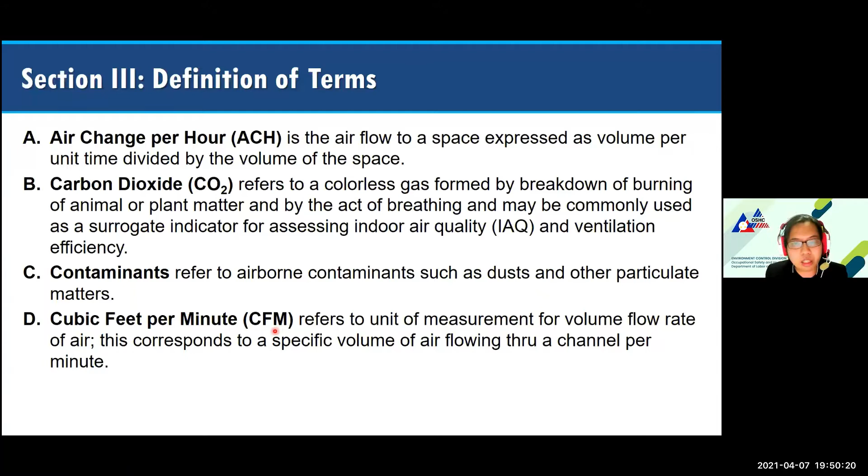Enclosed spaces are areas that have means of entry or exit, surrounded by walls and ceilings, and designated or designed for continuous occupancy. It may or may not have windows that could be freely opened, and this may include but is not limited to meeting rooms, conference halls, ballrooms, churches, etc. So anything that is a workplace surrounded by walls can be classified as an enclosed space.

General ventilation refers to the flow of air into and out of a working area to dilute any contaminants by providing additional fresh or natural air. General ventilation can be provided through natural or mechanical means. As we have learned in basic occupational safety and health, dilution ventilation through natural or mechanical means, or both, should be considered as the primary engineering control. Ventilation conditions can be evaluated through the measurement of air change per hour and carbon dioxide.

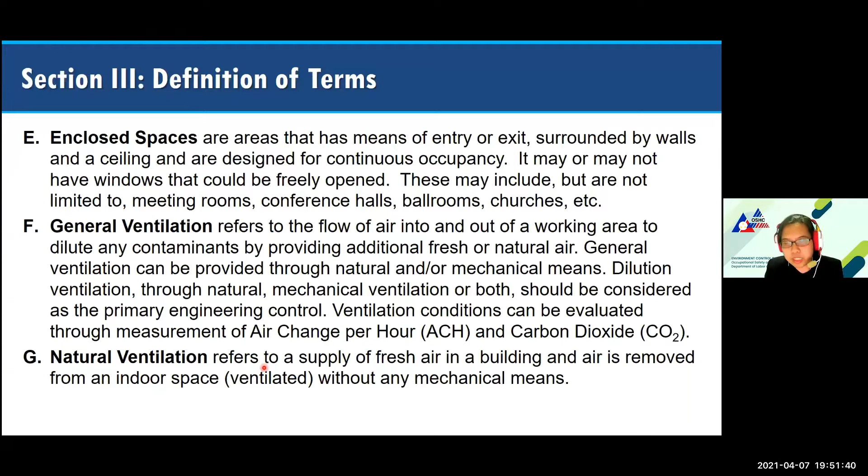Natural ventilation refers to a supply of fresh air in a building where air is removed from an indoor space without any mechanical means. And if there's natural, we also have mechanical, which refers to the use of mechanical systems such as fans, and often involves heating, ventilation, and air conditioning (HVAC) units or systems to supply or provide fresh air and even extract contaminated air. HVAC is the technology of indoor and vehicular environment comfort, and its goal is to provide thermal comfort and acceptable indoor air quality.

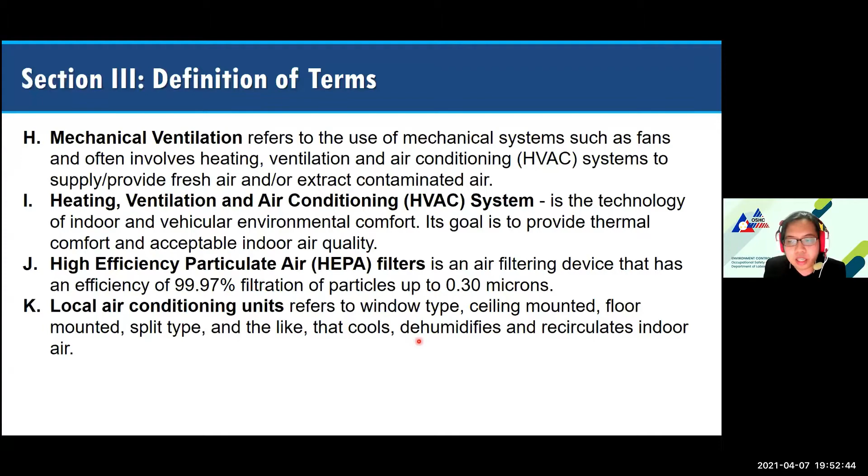High efficiency particulate air filters, commonly called HEPA filters, is an air filter device that has an efficiency of 99.97% filtration of particles up to 0.3 microns that it can filter out. And local air conditioning unit refers to window type, ceiling mounted, floor mounted, split type, and other cooling systems that dehumidify and recirculate indoor air inside a workroom.

Local exhaust ventilation refers to a mechanical system that is used to control contaminants by trapping them at or near the source. The objective of local exhaust ventilation is to prevent highly toxic contaminants before they reach the worker's breathing zone. It is designed to capture an emitted contaminant at or near its source before the contaminant has a chance to disperse into the workplace.

Okay. Minimum efficiency reporting value, or most commonly called the MERV, is a classification of air filtration devices based on their efficiency to filter particulates. Now, meron din po tayong objectionable air draft, which refers to very high or too much air movement directed towards the worker. So this is a disturbing type of air velocity.

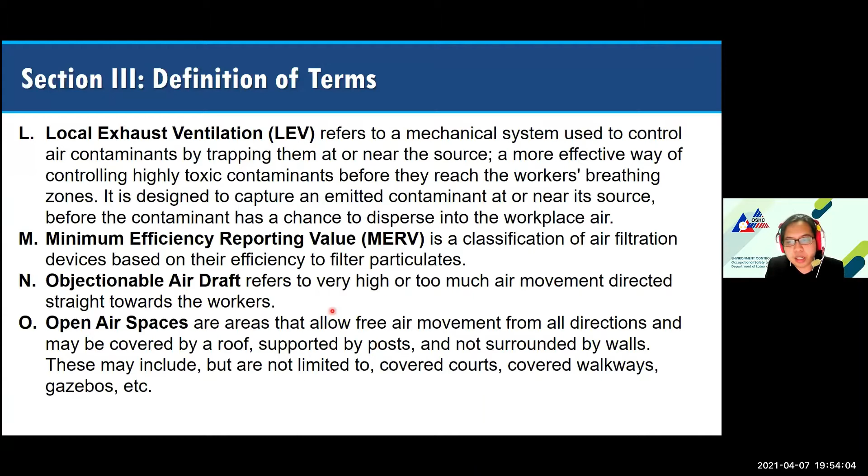And open air spaces are areas that allow free air movement from all directions and may be covered by a roof, supported by a post, and not surrounded by walls. This may include but is not limited to covered courts, covered walkways, gazebos, etc. So these are places wherein freely po moving ang ating ventilation or natural ventilation.

Other openings refers to openings such as roof exhausters, roof ridge openings, louver openings or louvers, or door openings. Anything po that can be opened is considered po as other openings. And qualified personnel refers to a company personnel that is knowledgeable and assigned by management to conduct ventilation assessment. Examples are safety officers, industrial hygienists, facilities engineers or managers, and even HVAC contractors.

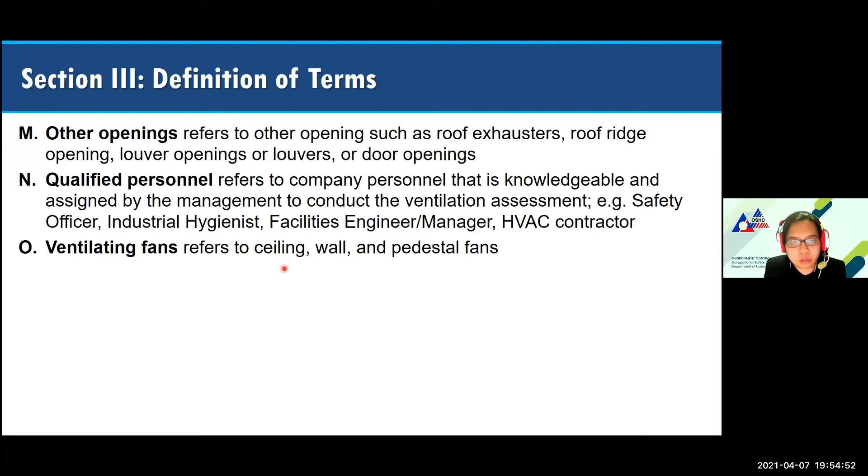And lastly po, ventilating fans refers to ceiling, wall, and pedestal fans. So these are the definitions of terms that we may encounter po all throughout this department order. All right. So to start po formally, yung ating recommendations and strategies. Pasok po muna tayo sa part ng general ventilation. General ventilation has different sections. Unahin po natin si non-air conditioned space. Ano po ba sinasabi natin dito?

Una sa lahat, sabi dito, maximize natural ventilation through the use of doors, windows, and other openings, if possible and safe to do so. So we have recommended that we should maximize all possible entries of fresh air. Yun lang po is kung safe siya gawin or free siya from any contaminants.

So we will not open doors or windows kung meron po kayong na-encounter na, kunyari, outdoor contaminants such as usok. If highly contaminated po yung area natin, hindi po siya advisable. Now, in case po na ganun, sinasabi natin sa number 2, if natural ventilation is not feasible or is inadequate, fans and air conditioning systems to supply fresh air and extract contaminated air shall be used as mechanical ventilation. So we will opt for the mechanical type of ventilation.

Ano ba yung mga ganitong klase? We have HVACs that provide fresh air and fans that can distribute the airflow or air velocity. Now, dilution ventilation must be done through the use of exhaust fans. Dilution ventilation focuses on the extraction of contaminated air, and it must have 6 to 12 air changes. This has been recommended by international institutions, which found that 6 to 12 air changes can maximize dilution inside the workroom without objectionable drafts for our workers inside the room.

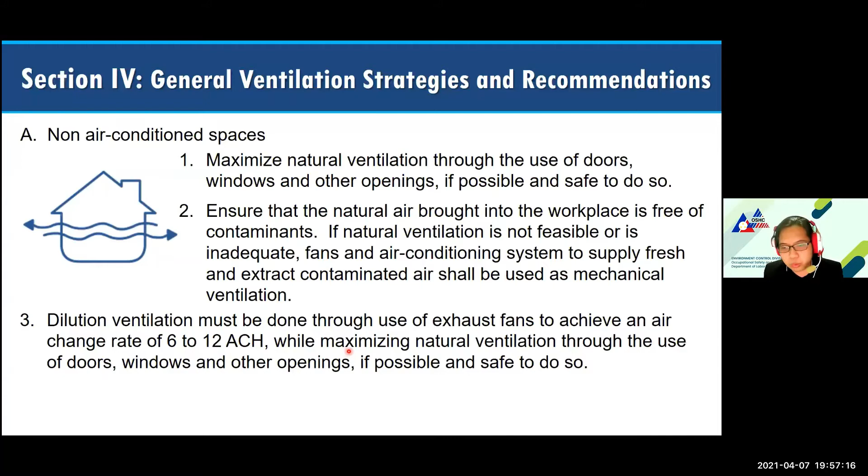So while maximizing natural ventilation through doors, windows, and other openings, if possible and safe to do so. For non-air conditioned workspace, number 4, exhaust fans should be kept continuously open as much as possible. This was taken from the DOH Department Memorandum, which says exhaust fans should be continually used, to ensure that airflow is maintained. As much as possible, we must prevent stale or stagnant air inside the workroom. So it is advisable that we maximize natural ventilation through our windows or doors, and provide exhaust fans inside our workrooms.

If the use of ventilating fans is unavoidable, there are some instances wherein, due to the large area, kunyari nandun ka sa gitna ng isang malaking area, kakailanganin mo talaga ng ventilating fan to ensure the thermal comfort ng isang worker. In that kind of scenario, increasing outdoor air changes by opening windows and other openings is suggested. Airflow direction should be considered in the layout of workstations to avoid person-to-person viral spread through airborne respiratory droplets. So ano pong ibig sabihin niyan?

It is suggested by this department order na kung kayo po is gagamit ng ventilating fan, it should be in a way na hindi po siya magkakaroon ng possibility to spread some aerosols or even yung virus or viral spread na sinasabi natin through airborne respiratory droplets. So it means that you should place the ventilating fan in a cleaner side of a room or space, and should have a flow to the less cleaner side. So what does that mean?

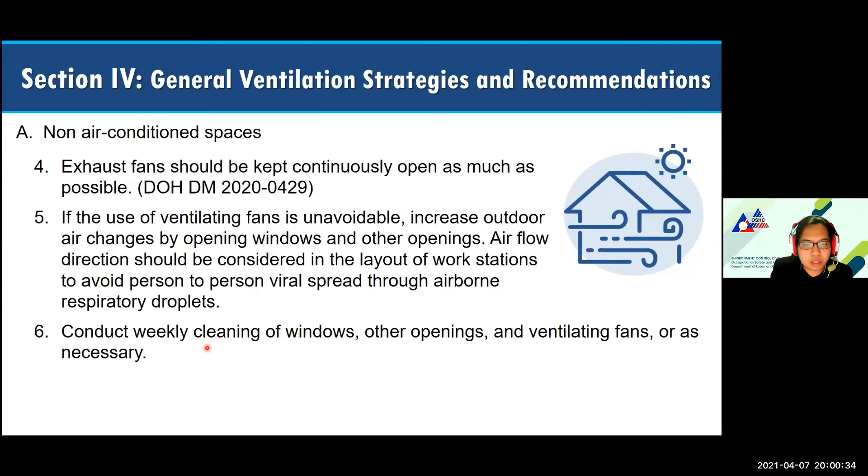Okay. Now, conduct weekly cleaning of windows and other openings and ventilating fans or as necessary. So again, cleaning or housekeeping and maintenance of each ventilating equipment or even the windows is recommended to be weekly, to ensure lang na this is properly kept. At the same time, pagdating sa ventilating equipments or ventilating fans, nakalagay kasi dyan as necessary kasi it doesn't mean din na lagi mo rin sila lilinisin, lalo na kunyari HVAC. So HVAC which is on the air conditioned space. So later on mas i-detalye natin siya. Okay.

So for air conditioned space, for HVAC systems where outdoor air supply should conform to the recommended breathing zone rates for the purpose of general air dilution and thermal comfort. So ano po ba yung breathing zone ventilation rates? It is the value po that can be seen sa Annex 2 po ng ating Department Order na kung saan it is the design of the room. So every establishment must comply with the design of the room as stated by the minimum ventilation rates that can be found in ASHRAE or even the Philippine Mechanical Code.

Okay. So run the ventilation system at least 30 minutes before and after space are occupied. So according to studies, and as part of preventive measures, it is best to run the ventilation system 30 minutes to 2 hours before and after the work has been done. But syempre, in terms of cost effectiveness, hindi siya gaanong effective for the 2-hour work period. So 30 minutes is the minimum that can be offered to ensure that all stagnant air inside the workroom will be diluted. All right.

So in workplaces that only have local air conditioning units, dilution ventilation may be done through the use of exhaust fans and filters MERV 13 or higher. MERV is again the filters, and this number corresponds to how tiny, kung habang tumataas yung number, mas maliit na kaya niyang i-filter out. Or the HEPA filters, which is the best filter out there, rating applicable to the unit may be installed.

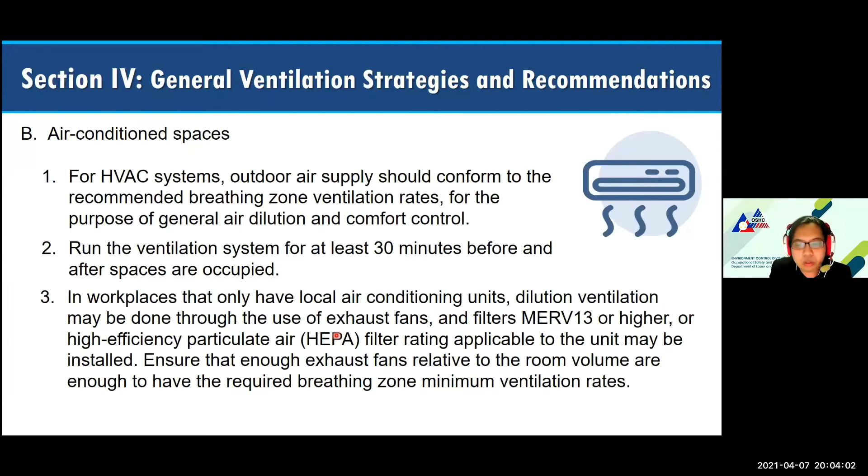So according to the DOH Department Memorandum for COVID, where ventilation is greatly recirculated or access to outside air is not feasible, filters such as HEPA filtration air purifiers can be used to clean recirculated air, provided that the unit is adequate for the size of the room in which it is installed.

So ensure the proper maintenance by following the manufacturer's recommendations of these devices. Okay. So actually, with regards to recirculation, it is greatly discouraged in terms of COVID-19. But if we cannot avoid recirculating an area, then you should have installed HEPA filtration air purifiers or HEPA filters

with air purifiers. Okay, so keep the louvers of local air conditioning units in an upward position to prevent the air flowing from one person to another while observing minimum public health standards, or minimum public health protocols. So since we are taking into consideration the airflow, as much as possible we prevent the local air conditioning units' airflow from being transferred to other persons.

All right. Frequent opening of windows, doors, and other openings may be done to supplement the mechanical ventilation system in achieving dilution. So it is best to have a combination of natural and mechanical means to provide dilution inside the workroom. Okay. Establish a cleaning and maintenance program for mechanical systems and ensure that no molds or stagnant water will be circulated in the atmosphere.

So filters must be changed when necessary and appropriate personal protective equipment must be worn by workers involved in cleaning and maintenance. So what are these PPEs? It can be gloves and a mask, and it's better if the mask used is an N95. Now, N95s are mostly being distributed to our front lines. So gloves, mask, and eye spectacles. Why? Again, these are droplets, but the possible routes of exposure for a person can be skin contact, ingestion, and inhalation.

All right. So as part of general strategies, we also consider the use of local exhaust ventilation. The local exhaust ventilation system shall have the basic components of hood, ductwork, air cleaning device, fans or blowers, and exhaust stack. So we should have these 5 basic components, and all installed LEV shall be equipped with a proper air cleaning device to treat, filter, and minimize airborne contaminants being exhausted to the atmosphere. Again, anything we release from inside shall be treated in accordance with other local standards that require all outside dispersion of air to be treated.

Okay, continuous operation of LEVs when workers are present allows additional air change in the workplace. Ensure that running hoods of LEVs are properly secured when not used during specific operations to avoid disruption. All right. So with the computation of air changes, we also consider the use of LEVs. LEVs can be added to the computation of air changes since they suction out contaminated air inside the workroom with the use of these basic components.

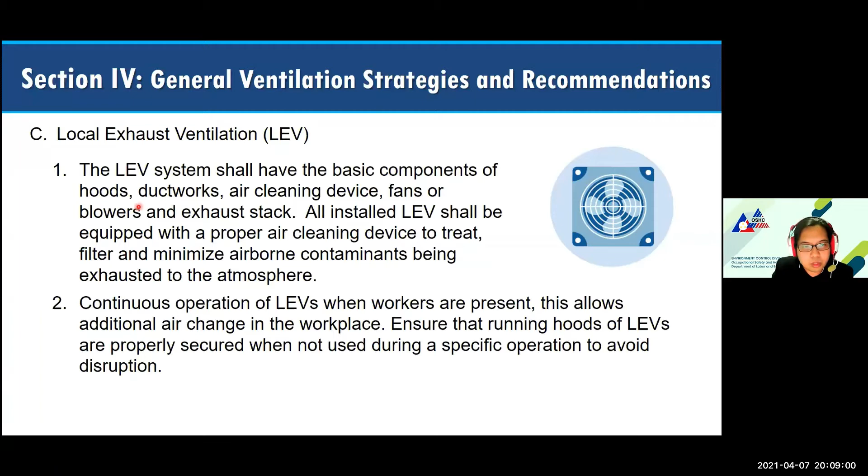Okay. So for restrooms and water closets, ensure exhaust fans in restroom facilities are functional and operating at full capacity when the building is occupied. So as stated earlier, our exhaust fans should be working at full capacity, because restrooms and water closets are areas where people meet each other. When you go to the comfort room, that's where you meet others. Even if you don't meet within your office, the possibility of having contact with others is

through the restrooms. And for this, when toilets or water closets are used, ensure that you close the toilet seat lid before flushing. Why? There are some studies saying that anything discharged by a person can be a factor as a biological hazard. So this is with consideration of other hazards present, to ensure that the air inside the restrooms is maintained to be clean.

So do not use hand blowers or jet dryers, as it contributes to the dispersion of potentially contaminated air inside the restroom. So ano po ba kasi ang purpose ng hand blowers and jet dryers? They are equipment that give a large amount, or sabihin natin mabilis na velocity. These velocities can interrupt our exhaust and can contribute to the dispersion or spread of the virus. Kaya it is highly discouraged. Actually, hindi nga sinabing discouraged dito, do not use. This is just to ensure na hindi po nagkakaroon ng dispersion sa loob ng restrooms.

For ventilation concerns for public transport naman, this was taken from DOH memorandums and DOTr memorandums. Guided by the LTFRB Memorandum Circular 2020-061 series of 2020, which is the updated health protocols for the PUVs, and the Department of Health Department Memorandum 2020-0429, guidance on the ventilation for COVID mitigation, and the DTI DOLE JMC 20-04-A and DTI DOLE Advisory 20-03 series of 2020, they have provided these recommendations when you are using public transport.

Una sa lahat, provide natural ventilation and access to open air. As you can remember sa ating DOLE Joint Memorandum Circular, it is recommended to have at least 3 inches of opening sa isang sasakyan. With this, you are providing natural ventilation inside, so the accumulation or the concentration inside the cabin of the car is minimized.

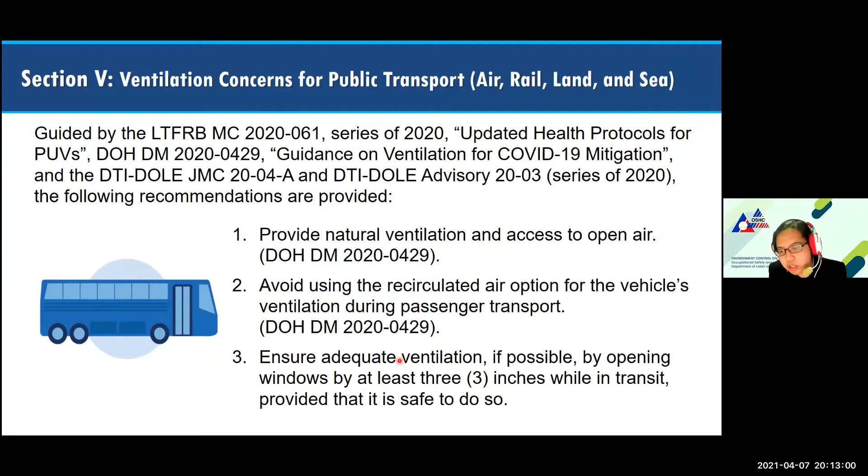Avoid using recirculated air options for the vehicle ventilation during passenger transport. Ito kasi is like the local air conditioning unit wherein kung nagre-recirculate ang hangin, hindi po siya na-filter out. Paulit-ulit lang din po, pinalalamig lang po yan. So we should ensure that our car hoods shall be maintained so that pag ginamit mo yung recirculate or yung free flowing ng hangin, hindi po siya puro alikabok. It is best to provide openings or to avoid the recirculation of air during passenger transport. Ensure adequate ventilation if possible by opening windows by at least 3 inches while in transit.

Number 4 is ensure regular and proper maintenance of filters of the vehicle air conditioning units if applicable. It is advised to check all filters of the vehicles; they should be maintained and replaced. As long as hindi na siya maganda, palitan na po natin siya.

For rail and road transport, impose a minimum of 15 seconds for the opening of doors for passengers' entry and exit. This is part of our railroads, sa mga trains natin. And ensure that the following minimum public health standards are being followed: wear face masks and face shields at all times. Strictly do proper, frequent disinfection before and after completing routes. As much as possible, we recommend na before and after routes, we conduct disinfection using all disinfection items na meron ang inyong company.

Implement 1 seat apart distance for passengers and do not allow passengers to sit beside each other. This is to ensure that close contacts are minimized. Again, as much as possible, 1 meter distance. But due to the limited space inside the vehicle, hindi po siya properly na-practice. So the recommendation is to ensure that there's a distance; 1 seat to 2 seats is very good po.

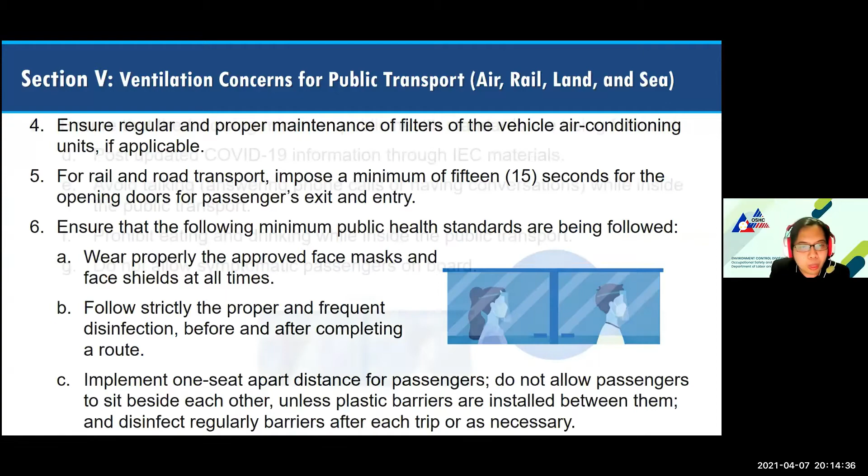Ensure the following minimum public health standards are being followed: post updated COVID information through IEC materials; avoid talking, answering phone calls, or having conversations while inside the public transport. Again, habang nagsasalita kayo, the chances of spreading increase. The risk is there.

Prohibit eating and drinking while inside the public transport as much as possible. If you can eat or drink before you take the public transport, please do so, to ensure na hindi kayo nagtatanggal ng PPEs inside the vehicles. And do not allow symptomatic passengers on board. It is best na before makapasok sa loob ng isang vehicle ang isang tao, ma-temperature check and malaman natin yung health status niya, para ma-ensure na hindi symptomatic passenger ang sinasabay natin sa loob ng vehicle.

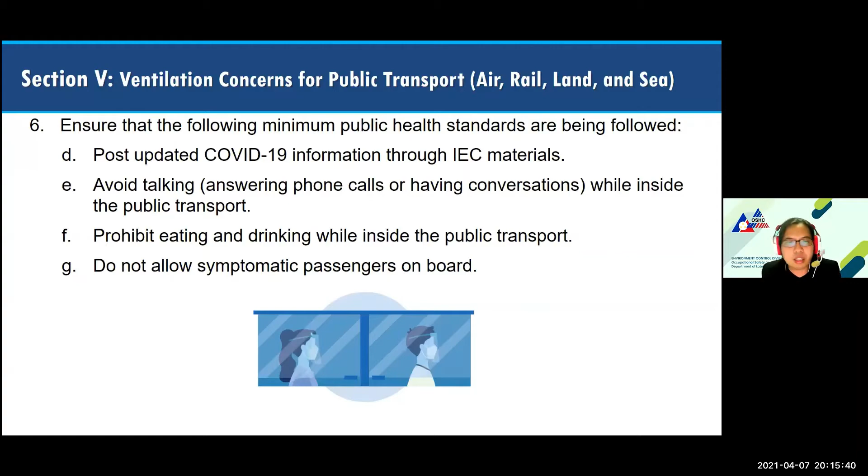For the ventilation assessment, which is Section 6 of the Department Order, the employer shall be responsible for maintaining an acceptable and safe indoor air quality. The qualitative assessment of this department order is through the safety officer.

Any qualified personnel may use the attached self-assessment checklist, which can be seen at Annex 1, in conducting the assessment inside the workplace. Okay, so he and she shall ensure that the ventilation system is working or functioning during the conduct of assessment in order to determine how air enters and exits from the space.

Now, other measures to assess this can be assessed through the following, either lingering smell. So sabihin natin kapag merong lingering smell, that even na nakabukas ang inyong ventilation equipment, then it's an indicator na hindi siya ganun ka-effective. Hindi ganun ka-effective ang ating ventilation system to dilute that workroom.

Now, stuffiness of the room, so pwede natin siya ibangga sa stale air or sa stagnant air. Feeling of high humidity or smokiness of the room. So any of these four can be an indicator that hindi naaalis kung ano man yung elements inside the workroom.

All right. For qualitative assessment, the use of natural or mechanical ventilation or the combination of both depends on the ventilation assessment to be conducted by the trained safety officer or ventilation indoor air quality specialist. Okay. So quantitative assessment for air movement, directional airflow, and objectionable air drafts shall be considered.

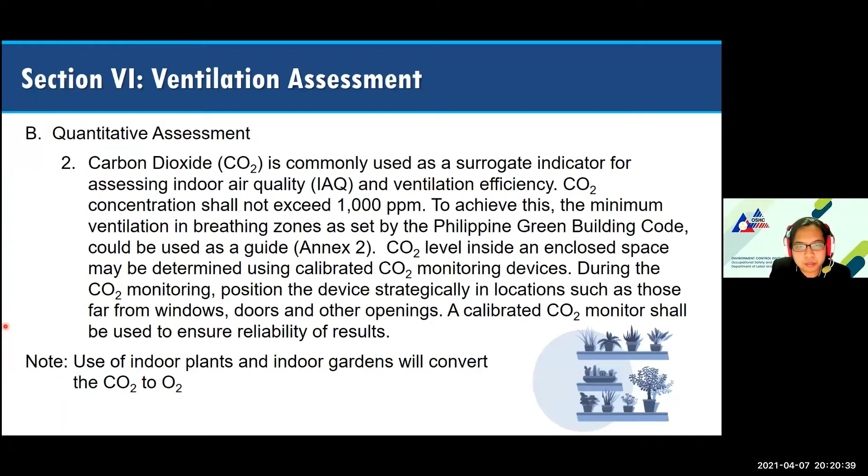All right. So we can refer to Annex 3 on how to determine air changes per hour, which is the formula on how to compute. And quantitative ventilation measurement shall be performed internally by a trained safety officer or EHS personnel of the company. So tandaan natin, trained. The DOLE OSHC or by DOLE accredited WEM providers. So we have accredited WEM providers that can help you to measure ventilation inside the workplaces.

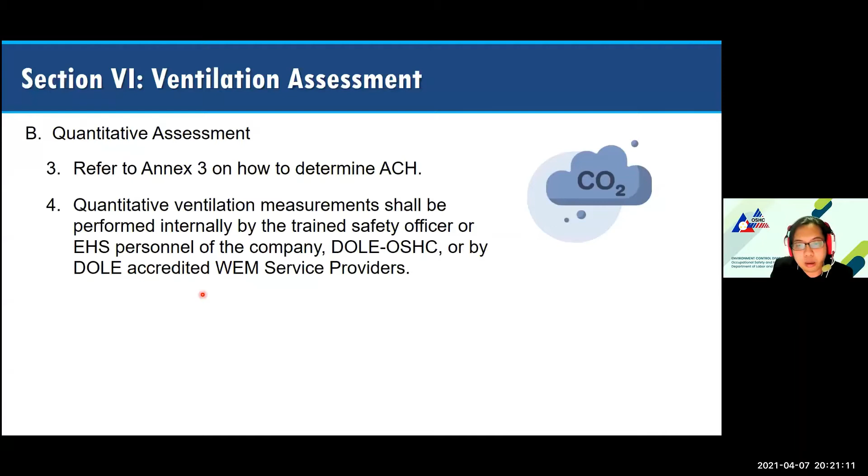All right. So in terms of monitoring under this department order, as provided in the DTI DOLE Joint Memorandum Circular, the OSH committee and/or the safety officer of the workplace overseeing the enforcement and monitoring of the minimum public health standards for COVID-19 prevention in the workplace shall include in its OSH program the monitoring and evaluation of the implementation of these guidelines.

Okay. At least on a monthly basis or as frequent as possible based on the assessment and recommendation by the OSH committee or the safety officer. So Annex 1 or other similar checklists may be used to ensure regular monitoring of ventilation measures and strategies are being implemented. So we are not limited only to Annex 1.

With regards to DOLE, the possibility is that they will look for Annex 1, which will be their basis. But if you have a more stringent checklist, then that's okay. It's okay to use more checklists, as the more stringent you are in providing safety and health, the better.

The DOLE Regional Office shall monitor compliance with its guidelines, and other government agencies shall likewise conduct their own monitoring based on their regulatory functions as applicable. In case of violation or non-compliance, the applicable sanctions and penalties under pertinent laws, rules, and regulations shall be imposed. With regards to DOLE, since this is to ensure the safety and health of our company, this can be linked to DO 198-18, the Act Strengthening Occupational Safety and Health in establishments.

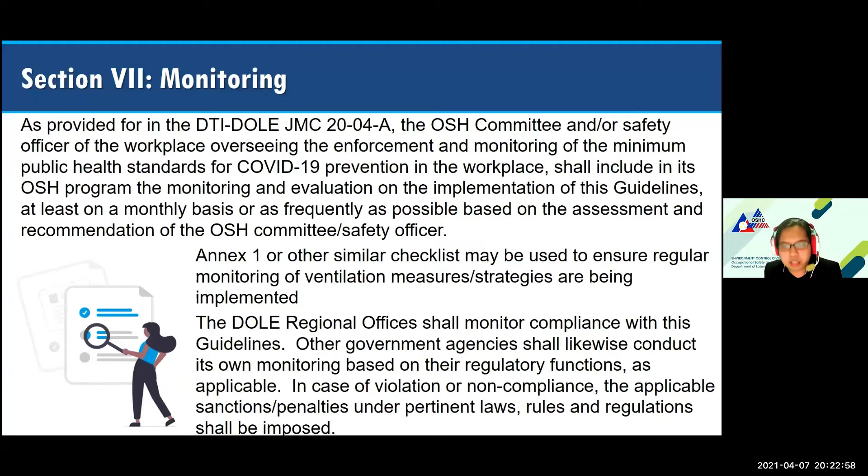For rendering technical assistance, the DOLE, DOH, DTI, DPWH, DILG, DOTR, DOT, and partners in the private sector shall extend their assistance and technical support to all workplaces, employers, and workers in complying with this advisory. We are more than willing to provide assistance, either through technical services or phone calls. If you have questions about this department order, we are free to provide some assistance.

This is Annex 1, the checklist on compliance with the advisory on workplace ventilation in the context of COVID-19. This is just a qualitative analysis, comparing non-air conditioned versus air conditioned workplaces.

In filling out this checklist, it's just a simple yes or no question, but you can also add remarks. So for example, in a room, the question is whether it's being used per room or per company. If you can provide it per room, why not? It would be better because at least your assessment per room will give you a greater idea of how you have prevented COVID-19 inside the workplace.

Are windows kept open or clean? That's there, yes, no, or not applicable - if you have no window, it's not applicable. Are there no lingering smells, stuffiness of the room? That's also there, yes or no. Are nearby spaces of the openable windows free from toxic gases and other pollutants? Yes or no. It's just as simple as filling out yes or no, since we don't need to make it too detailed. This is just to ensure that you have your own profiling of your company.

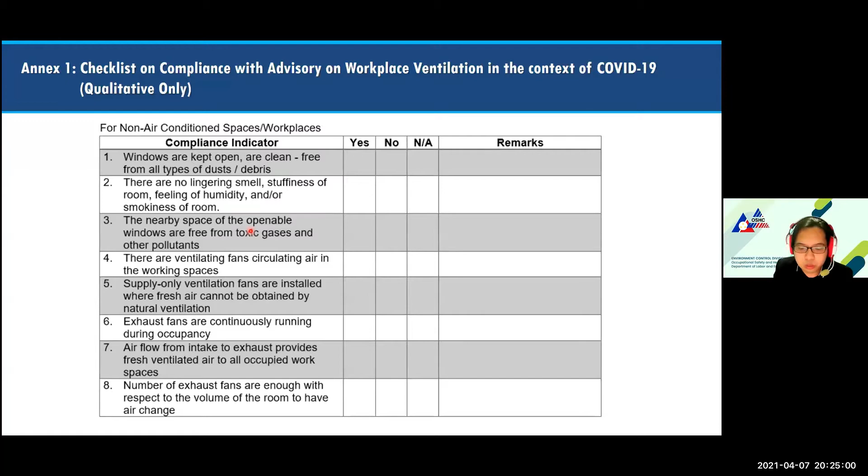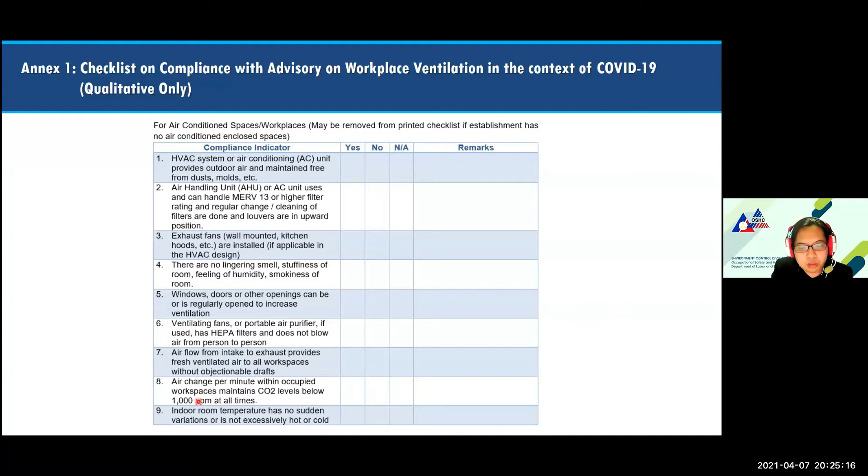With regards to air-conditioned workplaces, this is similar to the non-air conditioned checklist, but it focuses on the HVAC, air handling unit, localized air conditioning unit, and other airflows, especially the concentration level of CO2 inside the workplace.

Same with this - for example, conference meeting rooms, coffee rooms - if it's a well-known area where people congregate, it requires more ventilation rate. For health clubs or aerobics rooms, where the chances of exhaling carbon dioxide inside the area is very high, it requires a greater amount of ventilation rate.

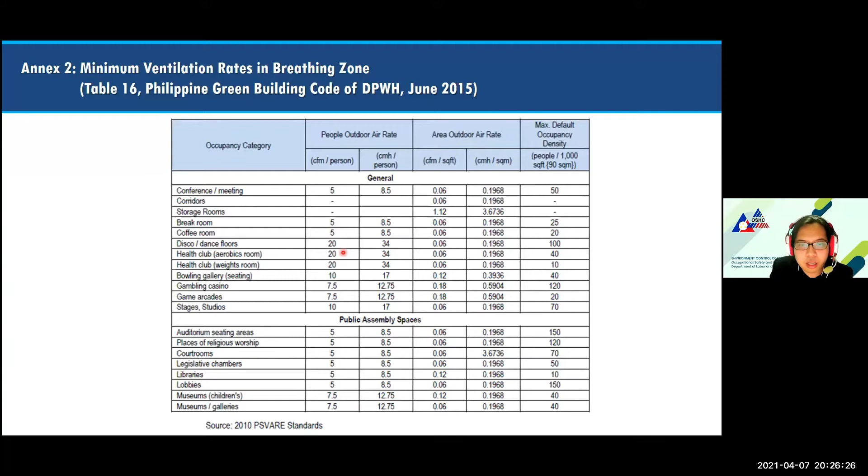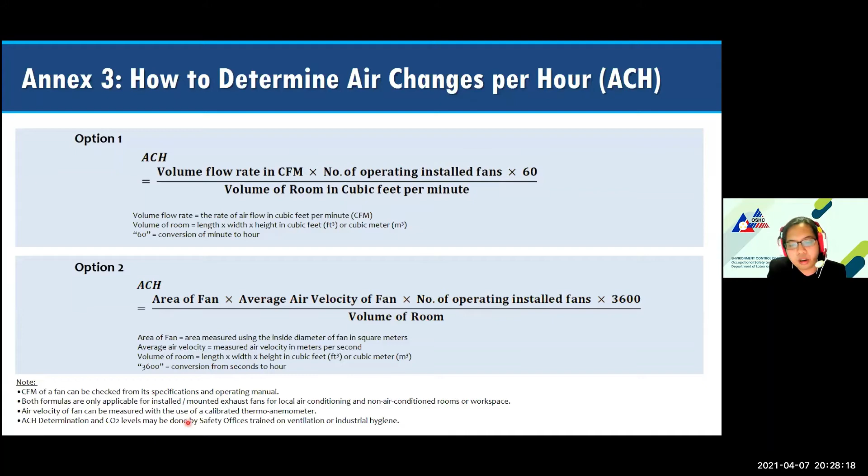Both formulas are only applicable for installed wall mount exhaust fans for local air conditioning unit and non-air conditioned rooms or workplace. Air changes per hour is basically computed sa ating exhaust part. Air velocity of the fan can be measured with the use of a calibrated thermo-anemometer, and air changes determination and CO2 levels may be done by the safety officer trained on ventilation or industrial hygiene.

That covers all the technical aspects of the Department Order 224-21. I hope everyone is clarified regarding this Department Order. So with that, thank you very much for listening.